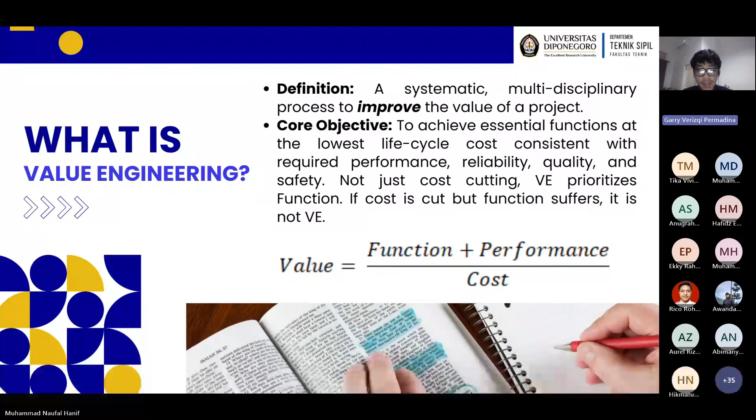For the project location and overview, the location is Taylor County, Kentucky, part of the Heartland Parkway connecting Cumberland Parkway to Bluegrass Parkway. The scope is construction of a new 7-mile bypass route, and the purpose is to divert regional traffic away from downtown Campbellsville to reduce congestion and improve safety.

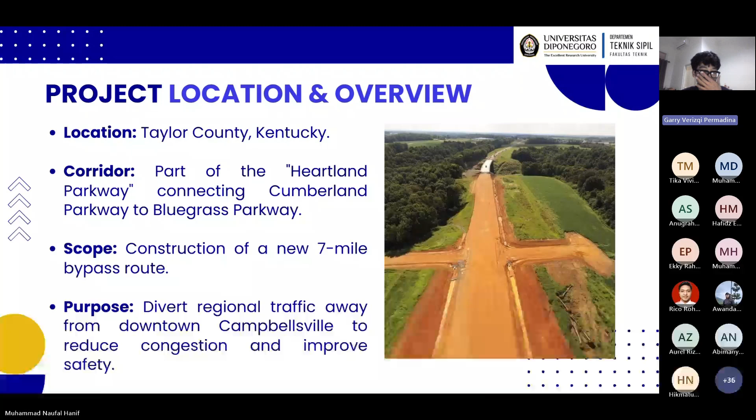This is the original design concept. There's a 24-foot roadway and 40-foot median, and the strategy is a Super 2 highway: initial build as a 2-lane roadway, 1 lane each direction, with the ultimate plan being a 4-lane divided highway. The right of way will acquire land for the ultimate 4-lane footprint immediately, and the design speed is 55 mph.

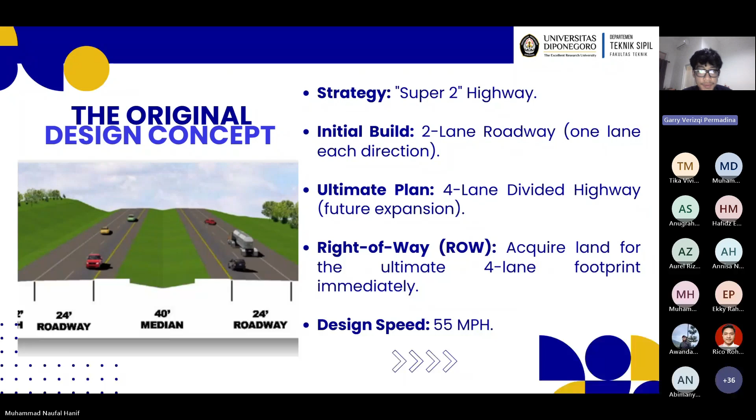For the constraints and challenges: first, topography with rolling hills and deep valleys. Second, earthwork requiring 700,000 cubic yards of excavation and 500,000 of embankment. For hydrology, the route crosses 3 significant valleys requiring drainage structures. For sensitive areas, there are 2: Tebbs Bend Battlefield, a historic area, and a USACE Wildlife Management Area.

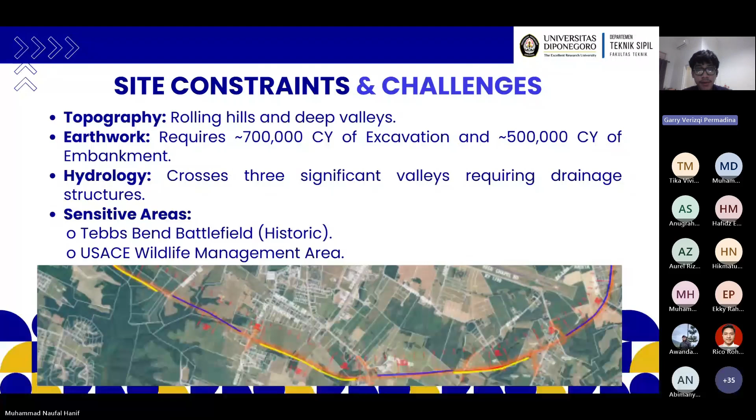The study was conducted in 2014, just before final design began. This is the ideal time for VE, late enough to have data, but early enough to change the plan without delaying construction. The study cost was 60K, but found 7 million in savings, a massive return on investment.

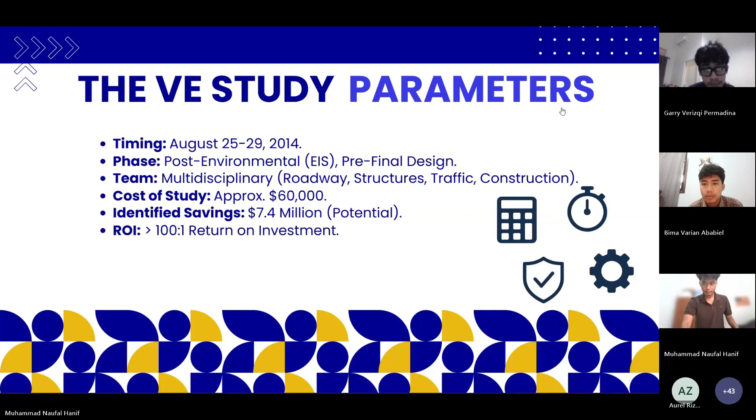During the first phase, the team validated the budget and found a critical error. The designer assumed the bridge would cost $85 per square foot, but given the height of the valley, some 90 feet in the air, the VE team corrected this to $125. This raised the project budget by over 2 million and made the bridge a prime target for elimination.

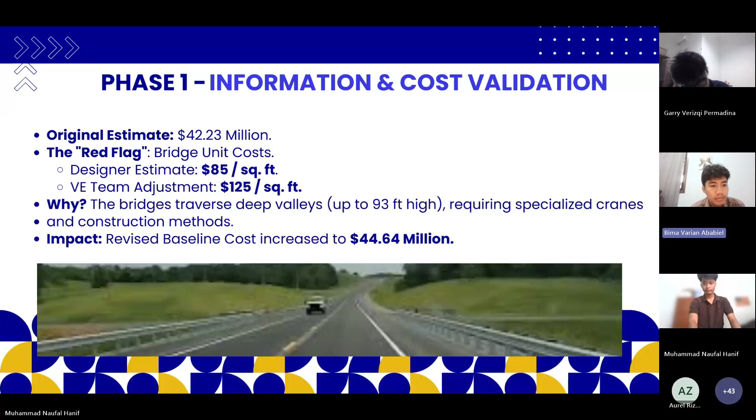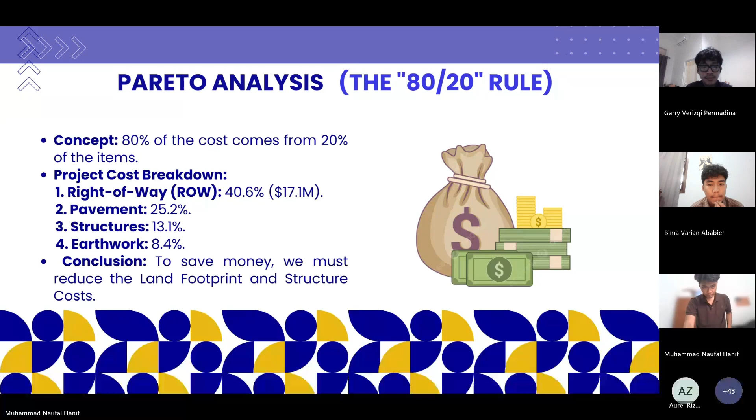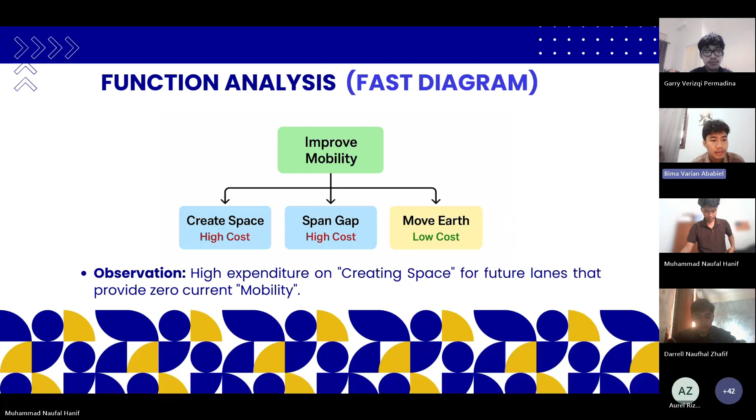The team generated 33 ideas, ranging from changing the route entirely to minor paving changes, through a structured evaluation process. These were filtered down to the best 9 recommendations, which we will now detail.

Performance attributes matrix show how we measure value: mainline operation, traffic flow and safety at 26%; environmental footprint and impact at 24%; local operation connectivity at 21%; maintenance, long-term upkeep at 14%; construction ease of build at 10%; and schedule, speed of delivery, at 5%.

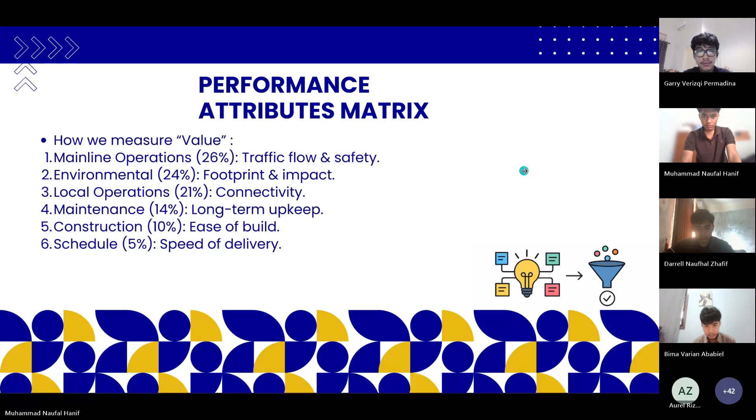VE1 and VE2: shoulder optimization. The value engineering program identified a potential total cost saving of 1.5 million by narrowing shoulder width. VE1 proposes reducing the width of the public road shoulder from the base specification of 12 feet, 10 feet paved, to 10 feet, 8 feet paved, resulting in savings of 0.7 million. Meanwhile, VE2 targets the bridge structure, proposing a reduction in bridge shoulder width from full width to just 4 feet, a specification permitted by AASHTO standards for long spans, yielding significant savings of 0.8 million in bridge deck construction cost.

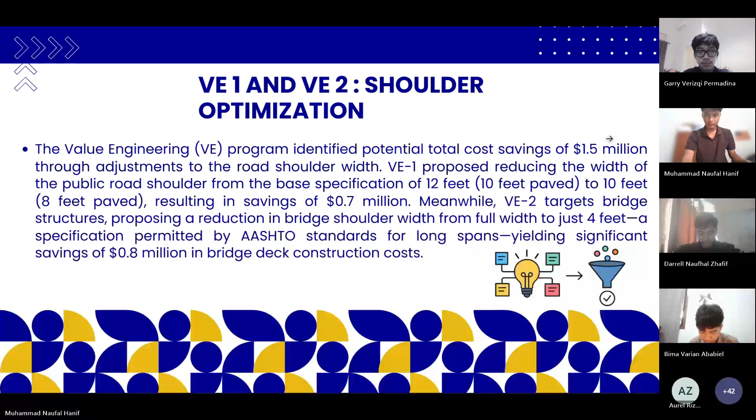VE3: median width reduction. This value engineering proposal aims to reduce right-of-way acquisition cost by reducing the width of the road median. The project baseline specification is a 40-foot concave median, but it is proposed to be reduced to 28 feet. Technically, a 28-foot median is still considered safe, as it provides adequate clearance and drainage. The 12-foot reduction in the median has a significant impact, reducing the total land requirement for the project by 9.6 hectares along the 7-mile corridor. This results in land acquisition cost savings of 0.6 million.

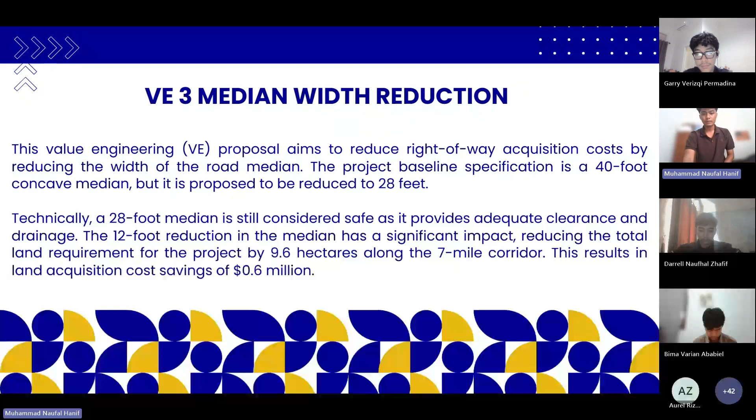VE5: cross road alignment. This value engineering proposal represents the single largest cost saving in the project. The original design targeted a perfect intersection geometry, which unnecessarily forced the project to build 1 mile of new side road and displace 7 homes. The VE team recommended using the existing side road alignment with minor improvements. This decision is technically safe and functional, but drastically reduces construction and land acquisition work.

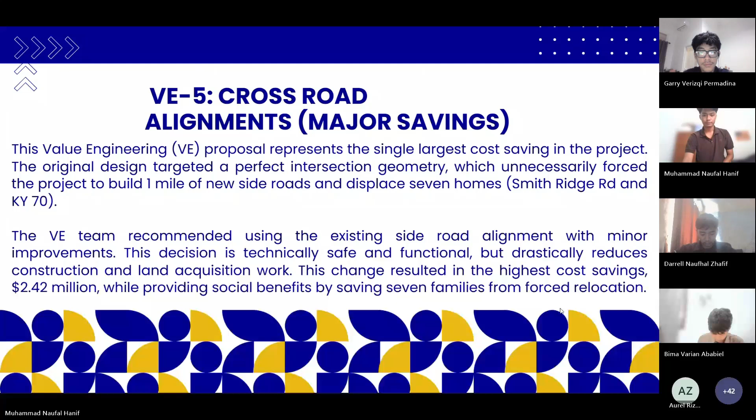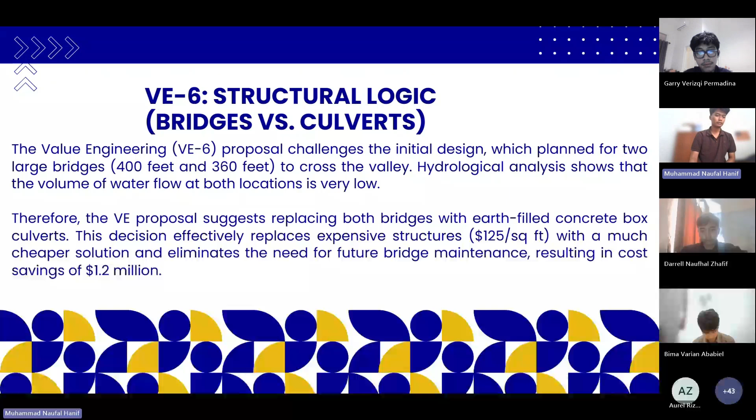VE6: structural logic. This value engineering proposal challenged the initial design, which planned for two large bridges to cross the valley. Hydrological analysis showed that the volume of water flow at both locations is very low. Therefore, the VE proposal suggests replacing both bridges with earth-fill concrete box culverts. This decision effectively replaces expensive structures with a much cheaper solution and eliminates the need for future bridge maintenance, resulting in cost savings of 1.2 million.

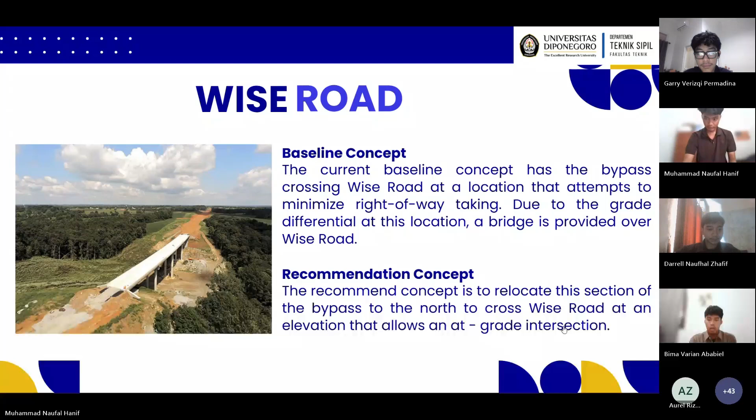For the advantage: eliminate structure, improve access to Wise Road, and eliminate the need for a channel change. For the disadvantage: introduce an intersection at Wise Road, may result in additional relocation, increase earthwork, and may have to revisit environmental assessment.

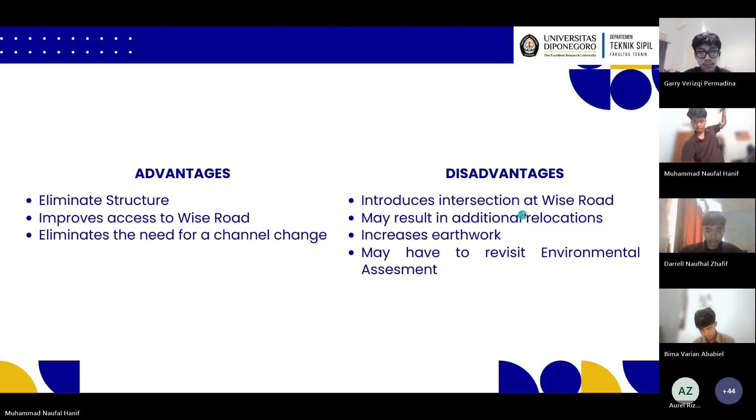Technical detail of Wise Road: the recommendation focuses on removing the structure at Wise Road. Several options were reviewed, including adjusting the road profile and shifting the bypass alignment to the north. After evaluation, the team selected an alignment shift that increased the curve radius from 2,500 to 5,100 feet. The adjustment positioned the crossing with Wise Road between the yellow and light blue alternative.

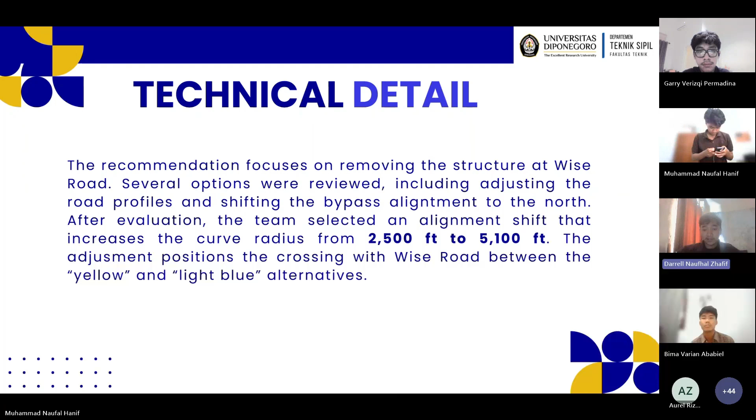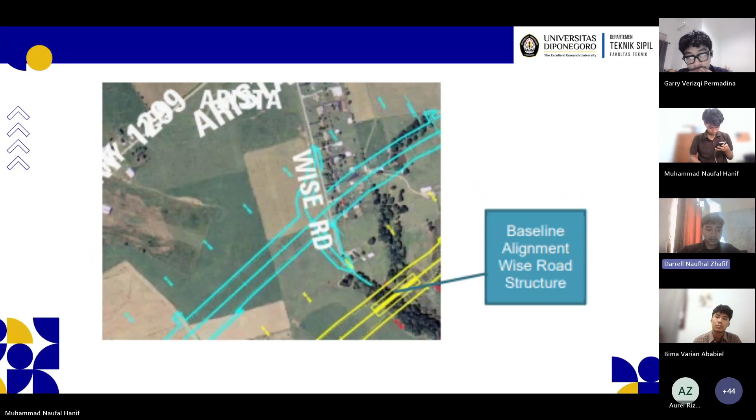Next. This is a picture of the baseline alignment Wise Road structure.

The cost summary: the total project costs are determined using the same procedure as the baseline. This saves 1.7 million by eliminating a bridge and actually helps the local community by giving them access. All the costs are shown in the table.

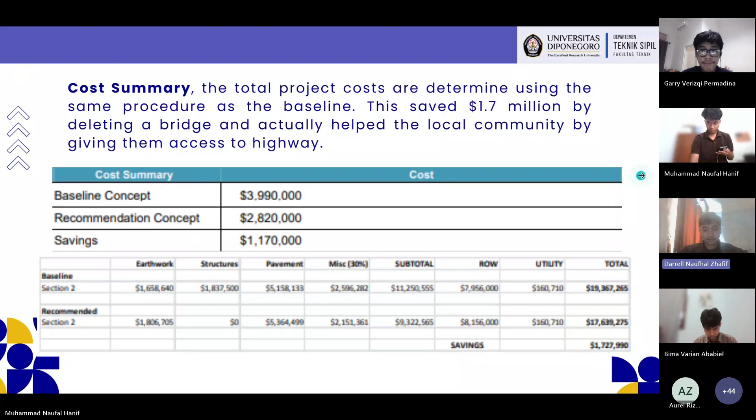Next, this is for the wagon box. The baseline concept is to span over a small drainage way and Wise Road with a traditional bridge. The recommendation concept is to replace the bridge with a wagon box structure and a 60-inch pipe.

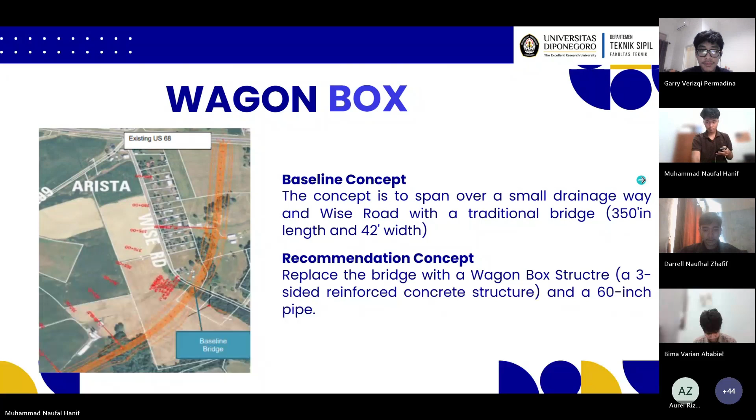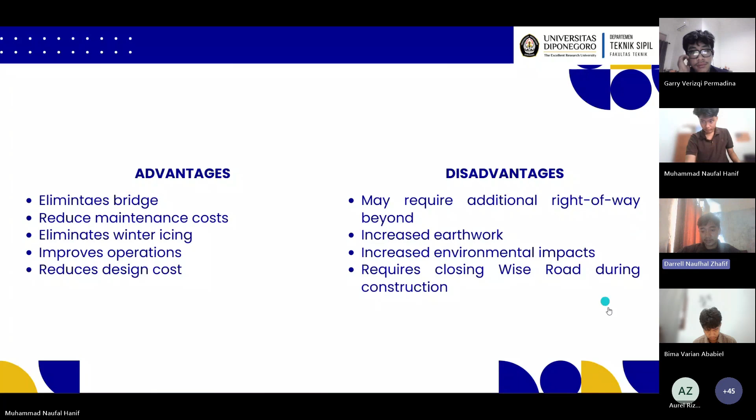Next, the advantage of the wagon box: eliminates the bridge, reduces maintenance costs, eliminates winter icing, improves operation, and reduces design costs. For the disadvantage: may require additional right of way, increase earthwork, increase environmental impacts, and requires closing the road during construction.

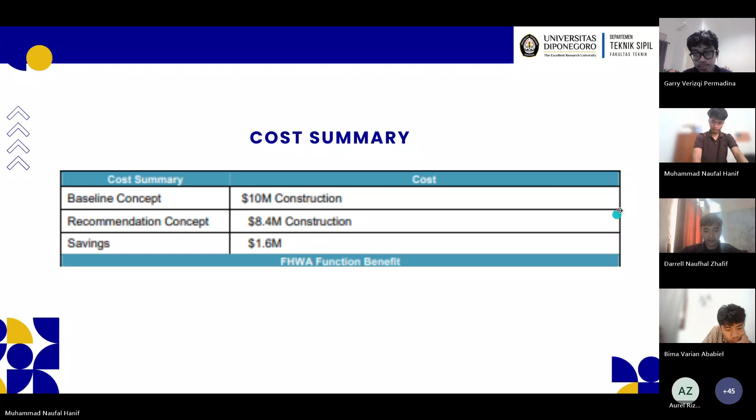Now for the 2+1 with 2+1 lane right-of-way. The baseline concept is the original design to build 2 lanes initially with the right-of-way, with the ultimate design set to allow expansion to 4 lanes with a depressed median. The recommendation concept is to design one side of the ultimate 4 lanes with a 2+1 design, purchasing right-of-way for an ultimate design with 2+1 lanes.

Next, the advantage of 2+1 with 2+1 lane right-of-way is improved operation over 2 lanes by providing a safe place to pass, pushing the need to expand capacity further, less expensive construction than a 4-lane ultimate design, and safer passing conditions. For the disadvantage: increased cost over initial 2-lane construction.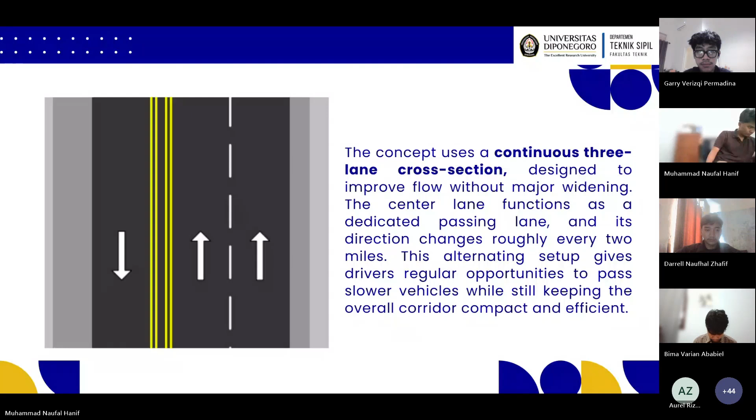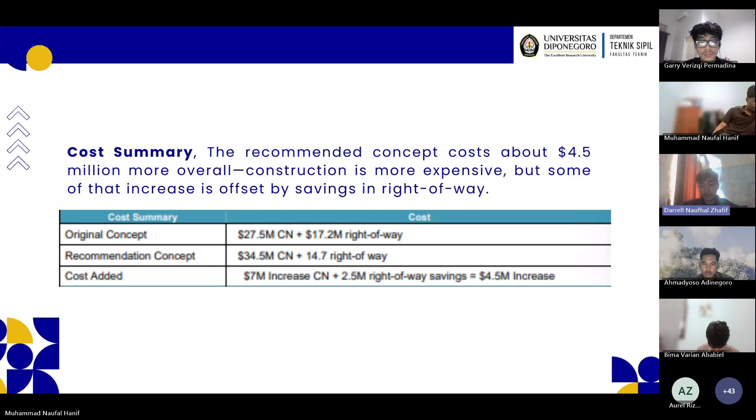Next, the cost summary for 2+1 with 4-lane right-of-way: the recommended concept costs about 4.5 million more. Overall construction is more expensive, but some of that increase is offset by savings in right-of-way.

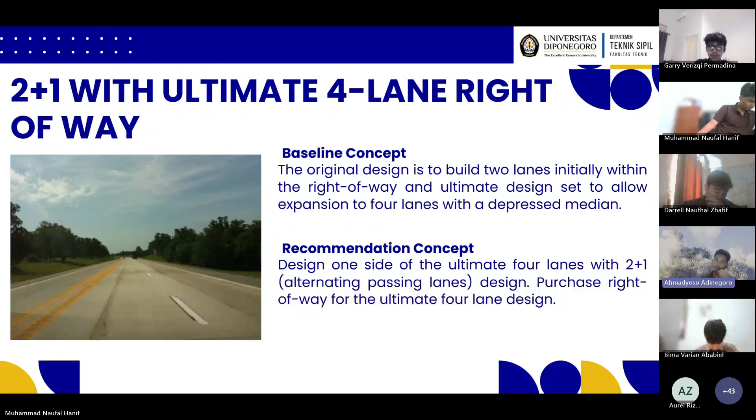Okay, the next one is 2+1 with ultimate 4-lane right of way. The baseline concept is the original design to build 2 lanes initially within the right of way, with the ultimate design set to allow expansion to 4 lanes with a depressed median.

The recommendation concept is to design one side of the ultimate 4-lane with 2+1 or alternating passing lane design, purchasing right of way for the ultimate 4-lane design. Okay, next.

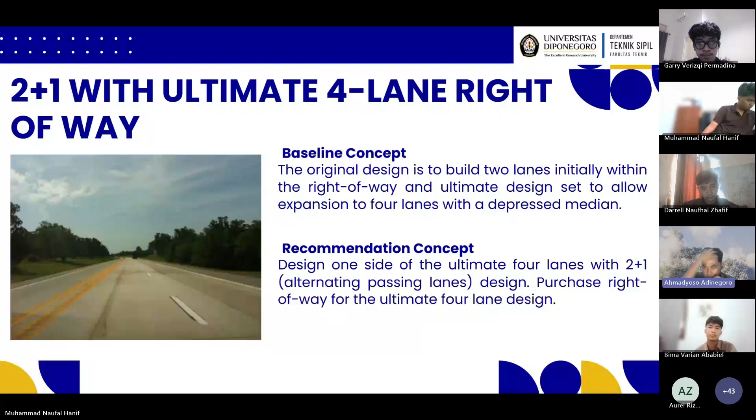The advantages are: first, improved operation (LOS) over 2 lanes by providing a safe place to pass; second, pushes the need to expand capacity further into the future and may not be needed; third, less expensive construction than 4-lane ultimate design; fourth, safer passing condition than 2-lane design; and last, may be more politically acceptable over 2-lane design.

For the disadvantage: increased cost over initial 2-lane construction, and increased cost of ultimate 4-lane construction should it be needed in the future. Okay, next.

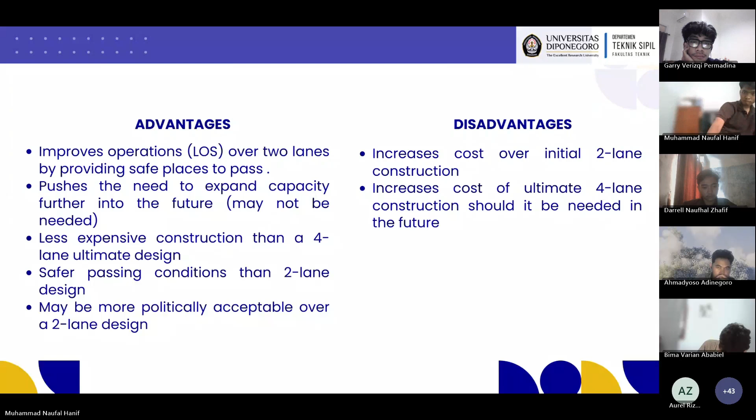Okay, this option costs more than the two-lane design but performs better, and it's still cheaper than building a full four-lane road. No extra right of way is needed, but additional pavement is required. The typical section includes 12-foot lanes, a median, and shoulders of 8 feet and 4 feet. Bridges will need to be widened by 16 feet.

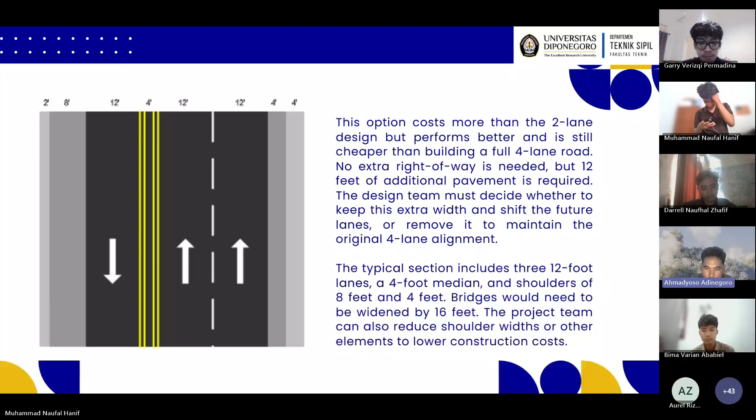Okay, next. The roadway cost for earthwork: mainline earthwork for the original two-lane is 600... 563 CY, and the unit cost of earthwork is $5.

Total cost increase of mainline earthwork is 600... total cost increase of the mainline work is $491. For the baseline, the first is main line pavement length is 31,575; the second, mainline two-lane pavement width is 24, and the shoulder width is 20.

The VE recommended alternative is mainline pavement width of 40, with recommended main line shoulder pavement width of 12. Mainline pavement unit cost is $60 per square yard, and mainline shoulder pavement unit cost is $52 per square yard. Okay, next.

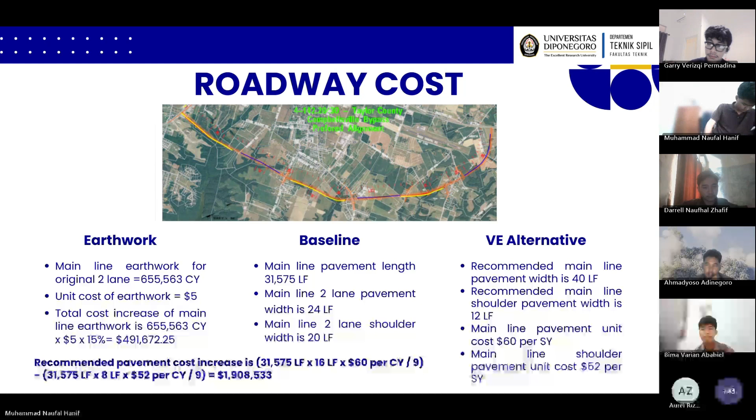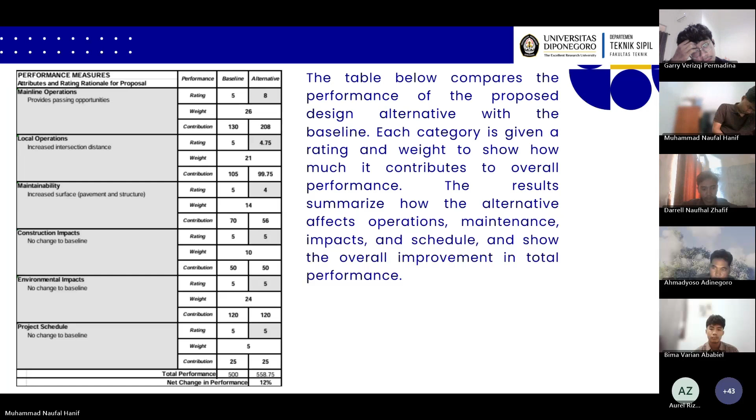Okay, that's all from us.